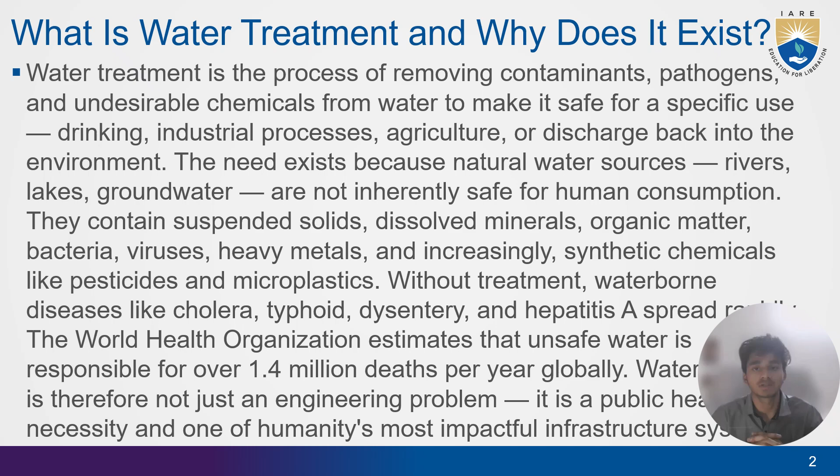On this slide, I'm going to discuss the types of water that need treatment. Not all water treatment is the same. The source and intended use define the process entirely. Drinking water treatment, potable water, has standards regulated by bodies like the EPA in the US or WHO globally.

Wastewater treatment handles water that has already been used from households, hospitals, and industries before it's discharged or reused. Industrial water treatment conditions water for manufacturing processes where mineral content, pH, or biological load could damage equipment or compromise product quality. Stormwater management addresses runoff from rain that carries pollutants from roads, rooftops, and farmland.

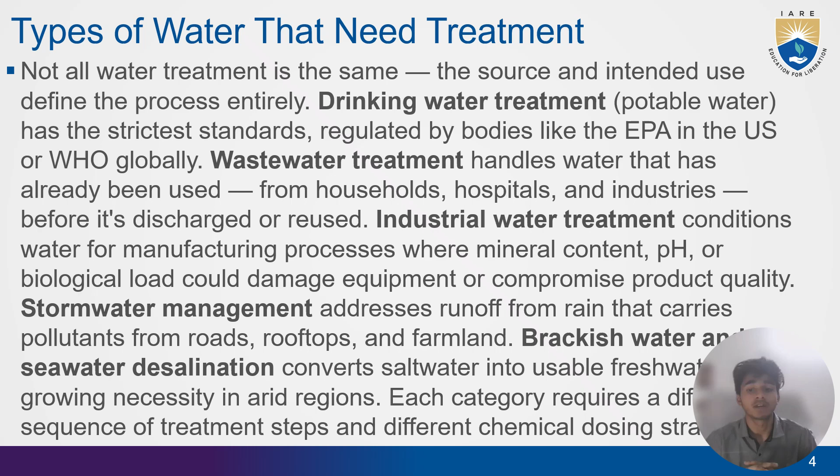On this slide, we are going to discuss the key water quality parameters. Before treating water, you must understand what's in it. Engineers measure a set of standard parameters. Turbidity measures how cloudy the water is, caused by suspended particles, and is measured in NTU. pH tells you how acidic or basic the water is. Drinking water should be between 6.5 and 8.5.

Biochemical oxygen demand, BOD, measures the amount of dissolved oxygen microorganisms need to break down organic material. High BOD means heavily polluted water. Total dissolved solids, TDS, is the combined concentration of all dissolved substances. Dissolved oxygen, DO, level matters for aquatic life and biological treatment processes.

Coliforms, particularly E. coli, are biological indicators of fecal contamination. Heavy metals like lead, arsenic, and mercury are monitored individually because they are toxic even at very low concentrations.

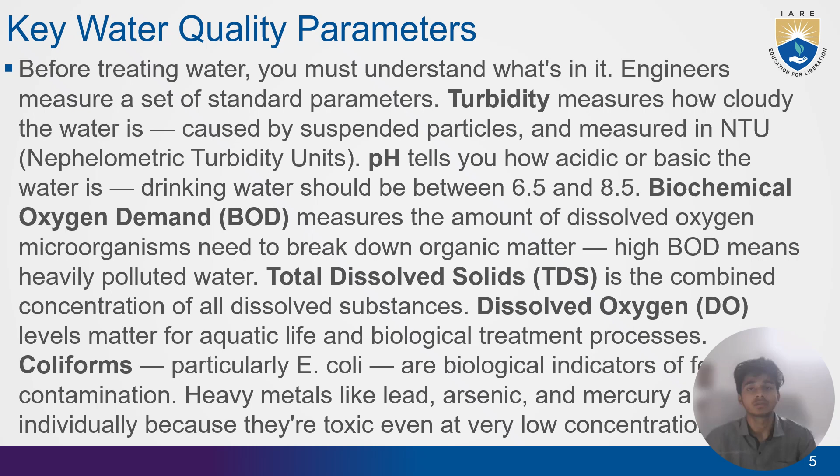In this slide, we are going to study stage 1, screening and pre-treatment. The first thing a water treatment plant does is remove large debris. Raw water from a river or a lake enters through intake structures fitted with bar screens, metal grids that catch branches, leaves, fish, and other large objects. After coarse screening, fine screens remove smaller particles. In some plants, micro strainers, rotating drum screens, are used.

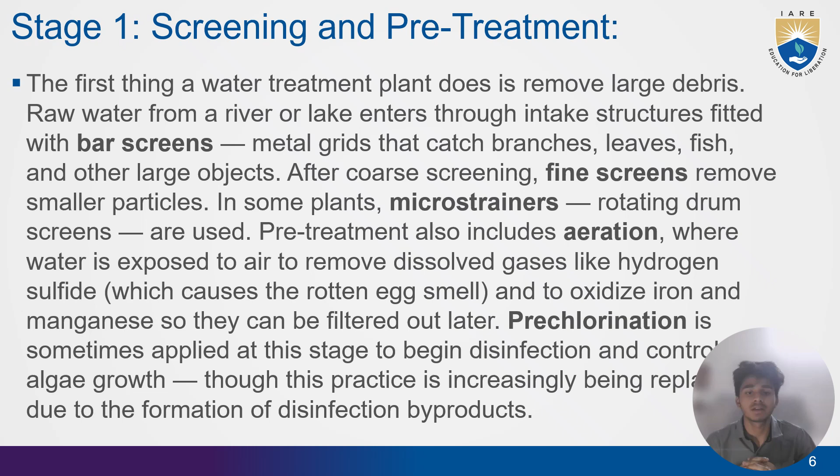Pre-treatment also includes aeration, where water is exposed to air to remove dissolved gases like hydrogen sulfide, which causes the rotten egg smell, and to oxidize iron and manganese so they can be filtered out later. Pre-chlorination is sometimes applied at this stage to begin disinfection and control algae growth, though this practice is increasingly being replaced due to the formation of disinfection byproducts.

In stage 2, coagulation and flocculation. This is one of the most important chemical stages. Water from natural sources contains extremely fine particles, clay, silt, organic matter, and colloidal substances that are so small they stay suspended indefinitely because they carry a negative electrical charge that keeps them repelling each other.

Coagulation involves adding a chemical coagulant, most commonly aluminum sulfate (alum, Al2(SO4)3) or ferric chloride (FeCl3), that neutralizes the negative charge on the particles. Once neutralized, particles can begin to stick together.

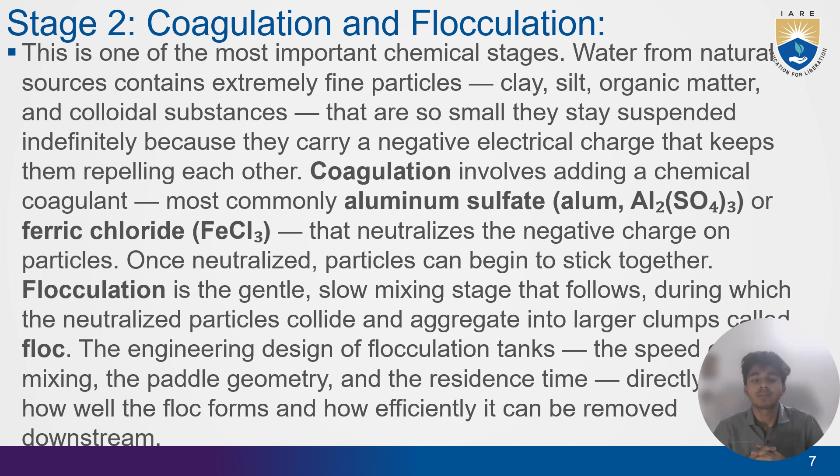Flocculation is a gentle, slow mixing stage that follows, during which the neutralized particles collide and aggregate into large clumps called floc. The engineering design of flocculation tanks, the speed of mixing, the paddle geometry, and the residence time directly impact how well the floc forms and how efficiently it can be removed downstream.

On this slide, we are going to discuss stage 3, sedimentation and clarification. After flocculation, the water enters sedimentation basins, large calm tanks designed to allow the heavy floc particles to settle to the bottom under gravity. This process is governed by Stokes' law, which describes how the settling velocity of a particle depends on its size, density, and the viscosity of the water. Larger, denser floc settles faster. The settled material at the bottom is called sludge, and must be periodically removed and processed separately.

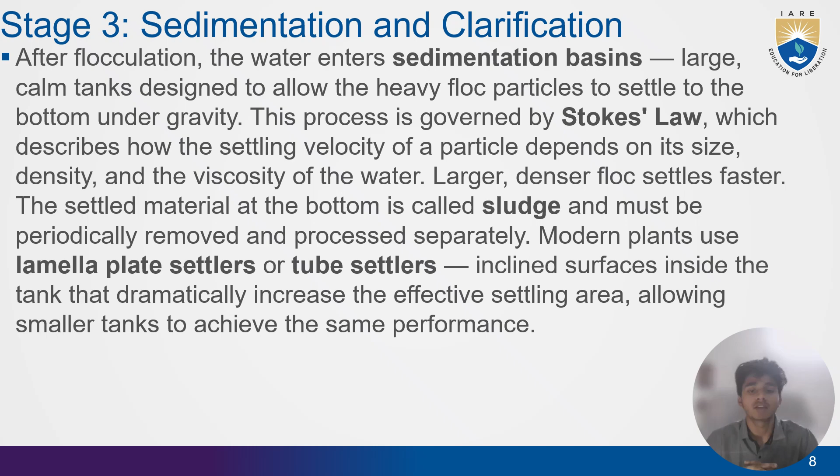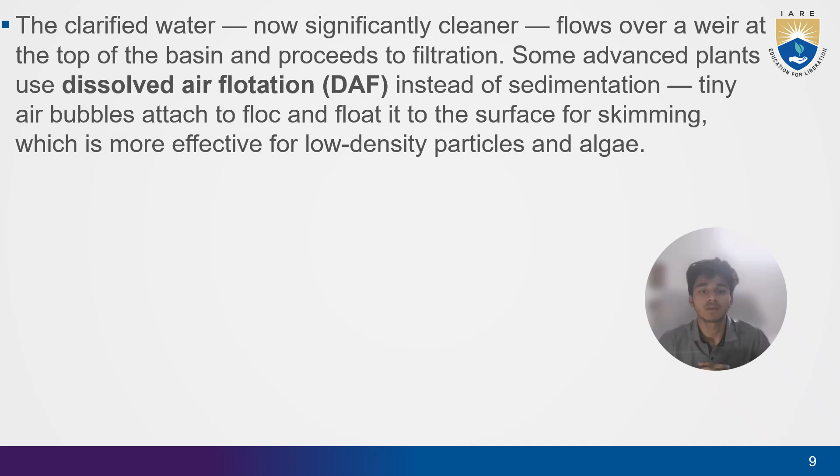Modern plants use lamella plate settlers or tube settlers, inclined surfaces inside the tank that dramatically increase the effective settling area, allowing smaller tanks to achieve the same performance. The clarified water, now significantly cleaner, flows over a weir at the top of the basin and proceeds to filtration. Some advanced plants use dissolved air flotation (DAF) instead of sedimentation. Tiny air bubbles attach to floc and float it to the surface for skimming, which is more effective for low density particles and algae.

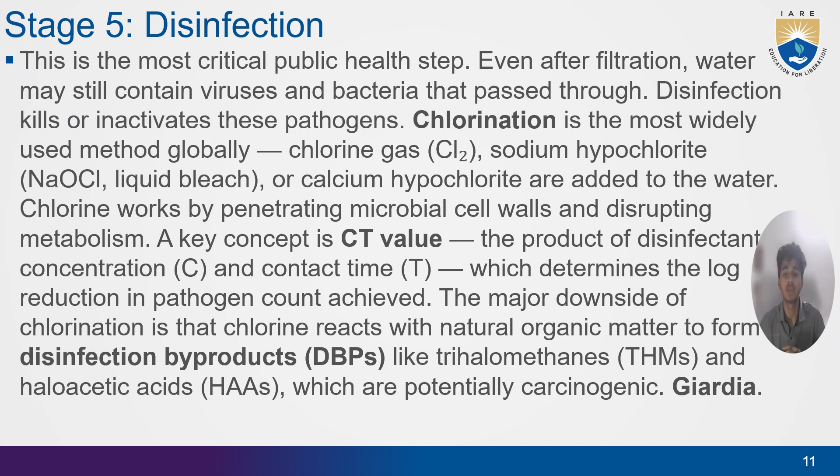A key concept is the CT value, the product of disinfectant concentration C and the contact time T, which determines the log reduction in pathogen count achieved. The major downside of chlorination is that chlorine reacts with natural organic matter to form disinfection byproducts (DBPs) like THMs and haloacetic acids (HAAs), which are potentially carcinogenic. This is why many plants use chloramines, ozone (O3), or UV radiation as alternatives or supplements. UV disinfection is particularly effective against chlorine-resistant pathogens like Cryptosporidium and Giardia.

Chemical dosing and pH adjustment. Throughout the treatment process, chemical dosing must be carefully controlled. pH adjustment is critical. If the pH is too low, acidic, the water is corrosive and will leach metals from pipes. If too high, basic, it reduces the disinfection efficiency and can cause mineral scaling. Lime (Ca(OH)2) or sodium hydroxide (NaOH) are used to raise pH. Sulfuric acid (H2SO4) and carbon dioxide (CO2) are used to lower it.

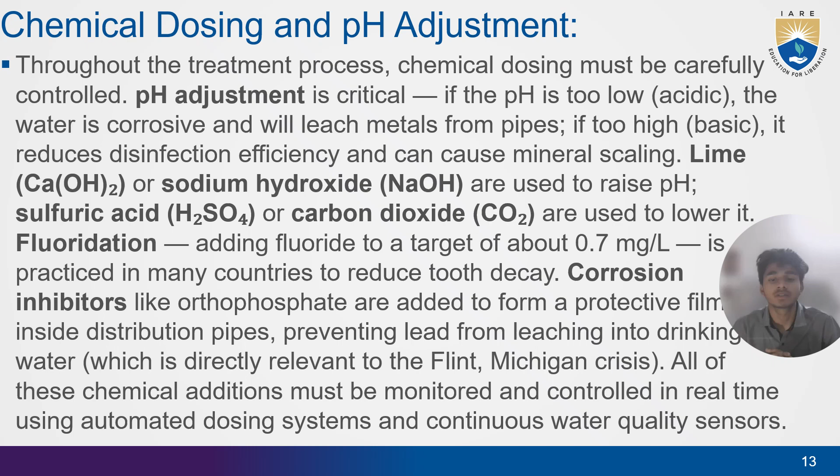Fluoridation, adding fluoride to a target of about 0.7 mg/L, is practiced in many countries to reduce tooth decay. Corrosion inhibitors like orthophosphate are added to form a protective film inside distribution pipes, preventing lead from leaching into drinking water, which is directly relevant to Flint. All of this chemical addition must be monitored and controlled in real time using automated dosing systems and continuous water quality sensors.

Advanced oxidation processes (AOP). As water sources face increasing contamination from endocrine disrupting compounds, pesticides, and industrial chemicals, conventional treatment falls short. Advanced oxidation processes (AOPs) are a family of techniques that generate extremely reactive hydroxyl radicals (OH), which can break down almost any organic contaminant. Common AOP systems include ozone combined with hydrogen peroxide (O3/H2O2), UV combined with hydrogen peroxide (UV/H2O2), and Fenton reaction (Fe2+ plus H2O2).

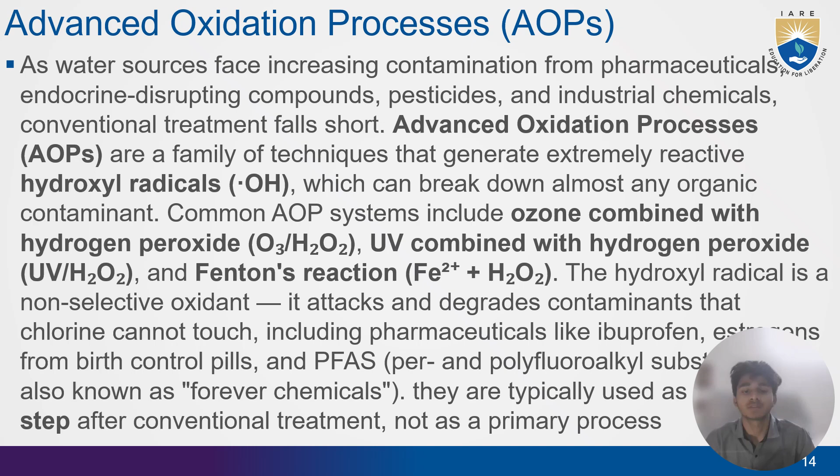The hydroxyl radical is a non-selective oxidant. It attacks and degrades the contaminants that chlorine cannot touch, including pharmaceuticals like estrogens from birth control pills and PFAS substances, also known as forever chemicals. They are typically used as polishing steps after conventional treatment, not as a primary process.

In this slide, we are going to discuss desalination, converting seawater to drinking water. In water-scarce regions, the Middle East, parts of Australia, coastal California, desalination is an increasingly important source of fresh water. There are two main approaches. Reverse osmosis desalination is now the dominant technology globally, having overtaken thermal methods due to dramatic reduction in membrane cost

and energy recovery devices. Multi-stage flash (MSF) distillation heats seawater and condenses the vapor. Essentially the same principle as the natural water cycle, but engineered. Multi-effect distillation (MED) uses a series of chambers at progressively lower pressure to boil water at lower temperature, improving efficiency.

The biggest challenges are energy consumption: RO still uses 3 to 4 kilowatt-hours per cubic meter of water produced. And brine disposal: the hypersaline reject stream harms marine ecosystems if discharged carelessly.

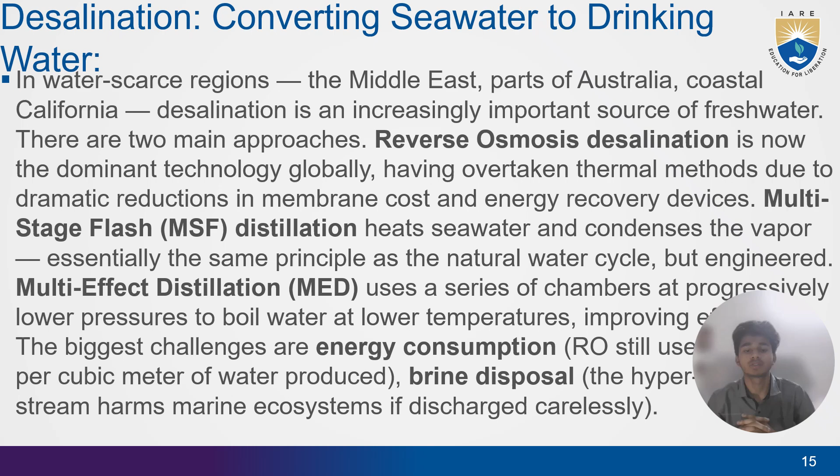In this slide, we are going to discuss wastewater treatment, primary and secondary. Wastewater treatment is a mirror of drinking water treatment but focuses on removing what humans have added to water. Primary treatment is physical: large settling tanks remove settleable solids and floating greases. Roughly 40 to 60% of suspended solids are removed at this stage.

Secondary treatment is biological. It is the heart of the process. Microorganisms are used to consume the dissolved organic matter in the wastewater. The most common method is the activated sludge process. Wastewater is aerated in large tanks with a diverse microbial community. The activated sludge breaks down the organic compounds. The oxygen supply is one of the largest energy costs of the treatment plant.

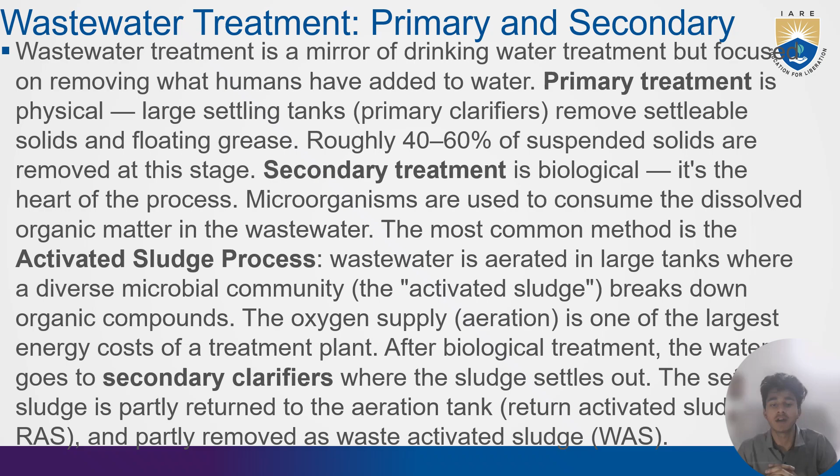After biological treatment, the water goes to the secondary clarifiers where the sludge settles out. The settled sludge is partially returned to the aeration tank, returned activated sludge (RAS), and partially removed as waste activated sludge (WAS).

Sludge treatment and biosolids management. All the solids removed throughout the treatment process accumulate as sludge, a semi-liquid mixture that is itself a significant waste stream requiring management. Raw sludge is first thickened to reduce its volume by removing water using gravity thickeners or centrifuges. It then undergoes anaerobic digestion in large sealed tanks.

Anaerobic microorganisms break down organic material in the absence of oxygen, producing biogas, a mixture of approximately 60% methane and 40% CO2. This biogas can be captured and used to generate electricity, making wastewater treatment plants partial energy producers.

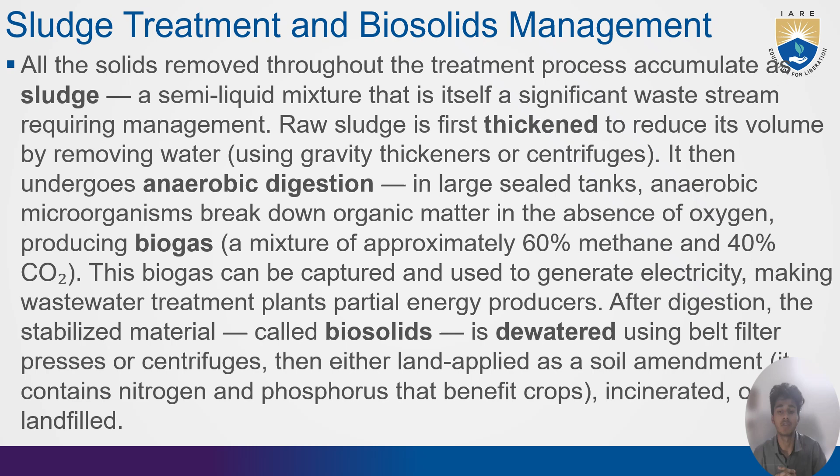After digestion, the stabilized material called biosolids is dewatered using belt filter presses or centrifuges, then either land applied as a soil amendment, since it contains nitrogen and phosphorus that benefit crops, incinerated, or landfilled.

In this slide, we are going to discuss water reuse and circular water systems. The concept of water reuse, also called water recycling, is shifting from a last resort to a mainstream engineering strategy. There are several levels. Non-potable reuse uses treated wastewater for irrigation, industrial cooling, and toilet flushing, applications where drinking water quality isn't required.

Indirect potable reuse (IPR) involves discharging highly treated reclaimed water into a river, reservoir, or aquifer where it mixes with natural water before being taken back up by a water treatment plant downstream.

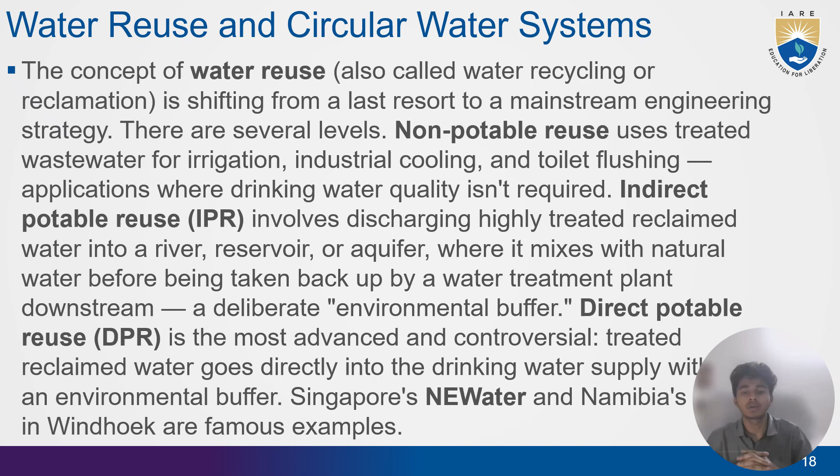A deliberate environmental buffer. Direct potable reuse (DPR) is the most advanced and controversial: treated reclaimed water goes directly into a drinking water supply without an environmental buffer. Singapore's NEWater and Namibia's plant in Windhoek are famous examples of it.

The future of water treatment engineering. The future of this field is shaped by three pressures: climate change, population growth, and tightening regulation on contaminant levels. Engineers will increasingly design energy-neutral or energy-positive plants using biogas from sludge digestion, solar and wind power, and energy recovery from osmotic pressure differences to power operations.

Resource recovery will reframe wastewater plants as water resource recovery facilities, recovering not just water but nutrients, energy, and even valuable metals. Decentralized treatment, small-scale systems embedded in buildings or neighborhoods, will supplement centralized infrastructure, particularly useful for rapidly growing urban areas in the developing world.

Nature-based solutions like constructed wetlands and managed aquifer recharge will integrate with engineered systems for cost-effective treatment at scale. Thank you.